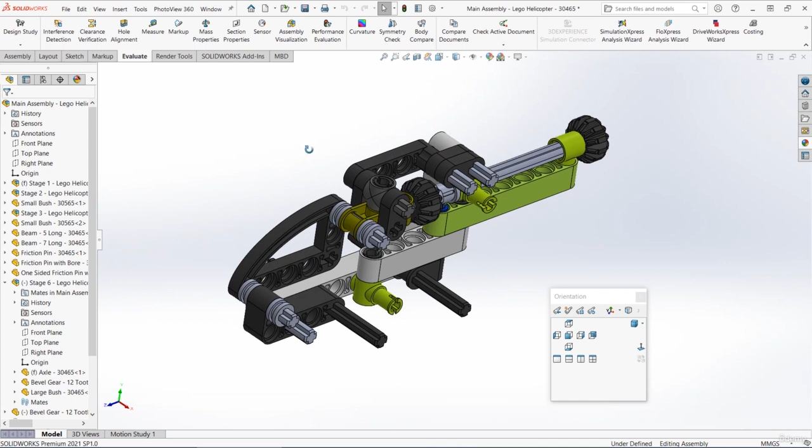We're now carrying on with stage 6, and for this one we're making the axle joint part. This is a little bit harder than the axle we just made, but luckily we've got a part that's halfway there. That's the large bush part. Let's open that from within the assembly somewhere, and then we'll save that and make some changes.

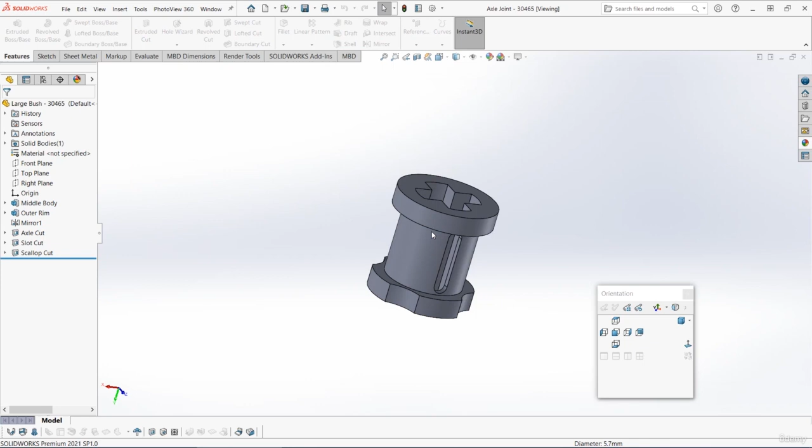Go to File, Save As, and choose Save As Copy and Open. And I'm going to put the file name down as axle joint. We need to now add another section to this part that can hold an axle perpendicular to the first one. To start off, let's start a sketch on the front plane. Let's get the circle tool and draw a circle about here. That should be 5.7 millimeters diameter.

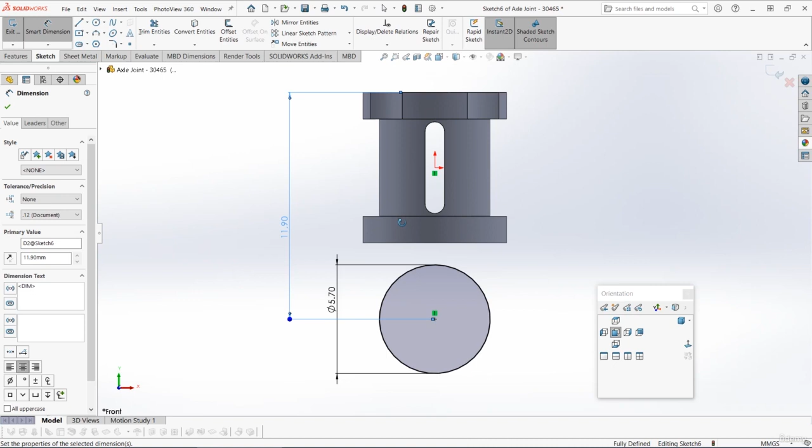It should be lined up vertically with the origin, and then the distance to the center of that circle from the bottom of the existing part is 11.9. We can then do a mid-plane extrude 7.8 millimeters. And I'm going to call that middle top. Next we're going to add the rims. So I'm going to start a sketch on either of these end faces.

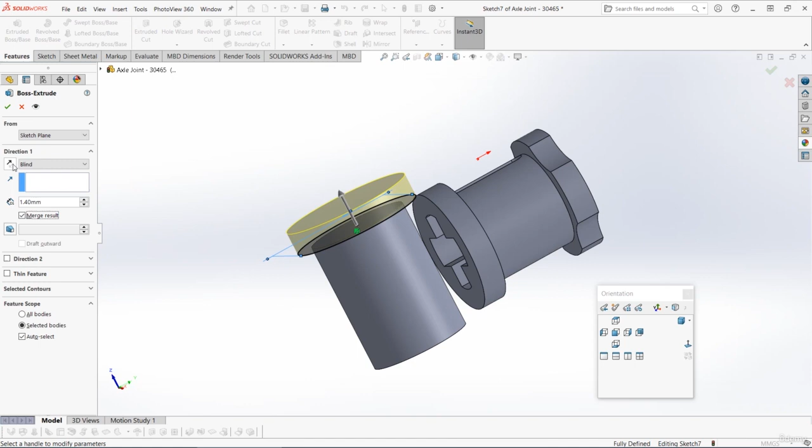I'm going to get the circle tool and I'm going to draw a circle that's a little bit bigger. This one should be 7.4. Then we can do a blind extrude 1.4 millimeters and make sure it's going inwards like this. This just adds that rim on the end. So I'm going to call this one top rim.

We can then mirror this over because there's one on each side. So let's select that top rim feature. Let's select the plane down the middle. So for me, this is the front plane. And with both those items selected, press mirror. Then press OK if the preview looks good.

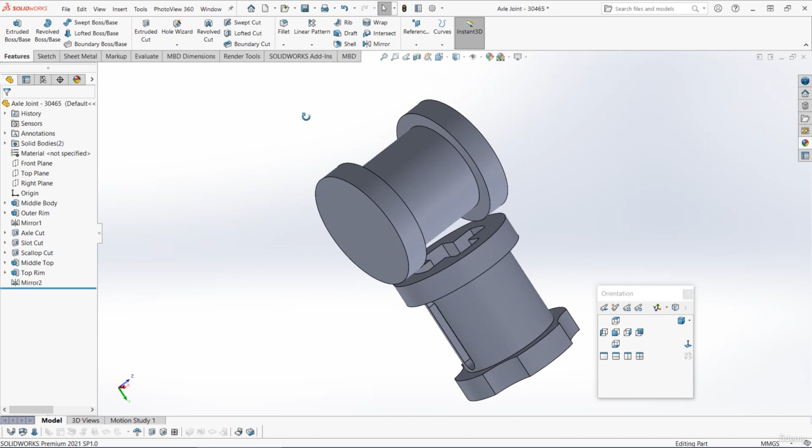Next up, we're going to add the section that joins these two bodies together. Start sketch on this plane, the right plane. Then go normal to and get the line tool and draw a sketch something like this. Start at the midpoint here. Go out to the left horizontally, a little bit beyond the end of that existing body. Then go downwards and pick up that outer line of the second body to about here.

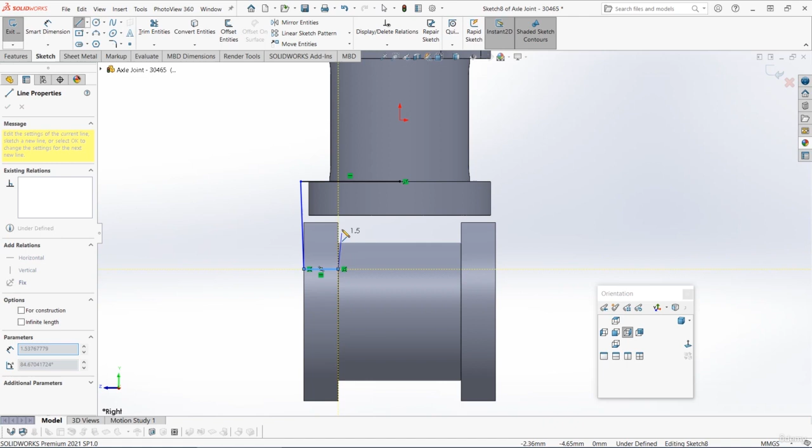Then go over to the right horizontally to pick up this edge. Then go vertically up to this end, then go back to the midpoint, and then go back up to the start point. And then this line on the left-hand side should be exactly vertical. So you can click on that and add a vertical relation. This should give you a sketch which is almost fully defined. We just need to add one dimension.

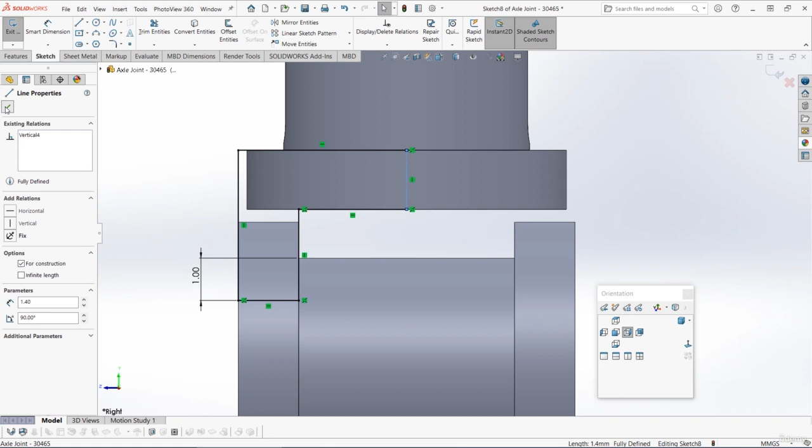Let's just get Smart Dimension and add in 1 millimeter here. So you should have a closed profile, something like this. We can then select this line in the middle, and then here on the left, choose For Construction. That turns this solid line into a construction line. We can then select everything in the sketch, and we can press Mirror Entities, and that will mirror everything we've selected about that center line. That should give you a solid profile that looks like this.

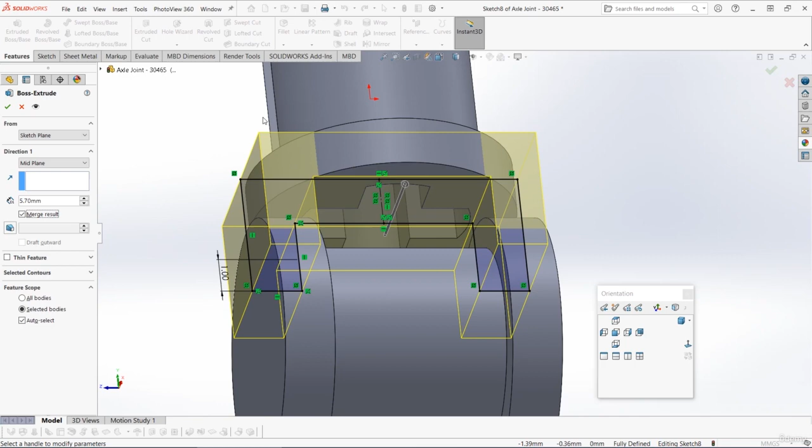We can then extrude this shape using a mid-plane extrude, so let's go to Features, Extruded Boss Base. Let's go mid-plane and 5.7 millimeters. It's the same as that inner diameter at the bottom. And I'm going to call that feature something like axle joint.

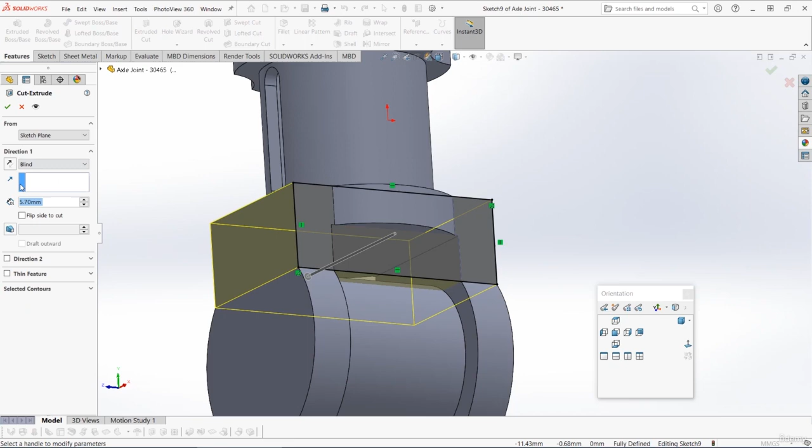Next up, we just need to cut away this curved section here. So I'm going to start a sketch on this flat face. I'm going to go normal to, and I'm just going to get a corner rectangle. I'm going to start from this corner and go down to this corner. And that should fully define your rectangle because the opposite corners are fixed. We can then just go to Features, Extruded Cut, and let's do a blind cut in this direction away from the main body.

It doesn't really matter what the distance is as long as it cuts through that curved section. So I'm just going to leave mine as about 5 there. We've now cut away that extra section and the joint is exactly the same size as that lower diameter.

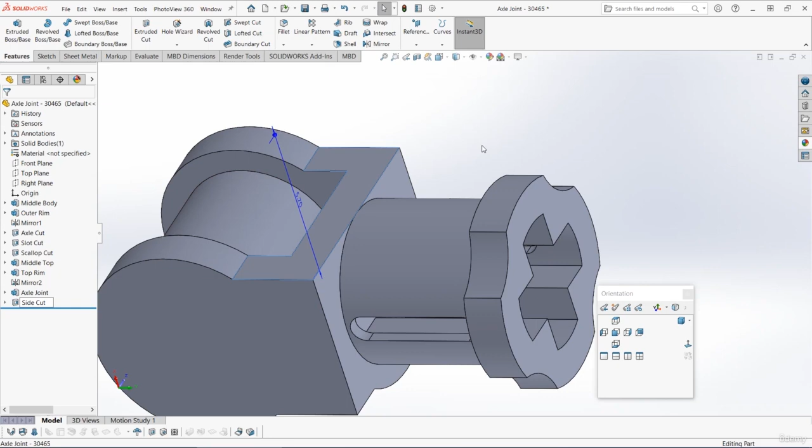I'm going to call that one side cut, and we then want to mirror this over to the other side. So select the side cut, select the plane that goes down the middle of the model. This should be the right plane, and then press mirror. And if the preview looks good, press OK. So we've now cut that curved section on both sides.

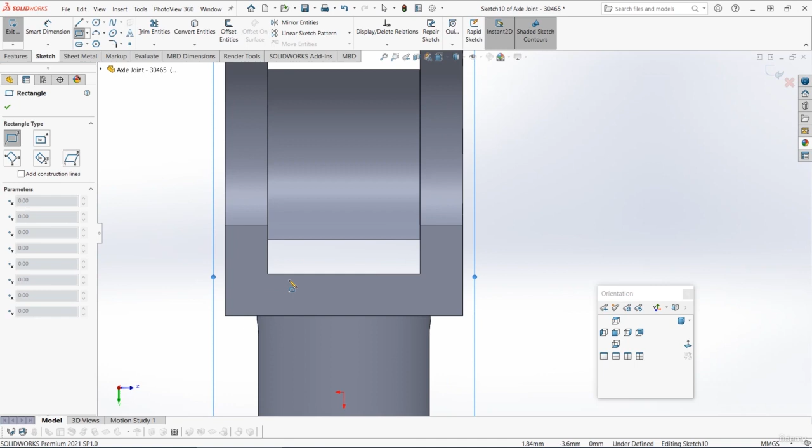Next up, there's a little wall inside this gap here. To draw this, start a sketch on the right plane, and then get a corner rectangle, and let's just draw from the bottom corner here up to this corner here. And again, that should fully define your rectangle because you've defined the two outer opposite corners. Then let's do a mid-plane extrude, 1.4 millimeters mid-plane, and press OK. And let's call that something like middle wall.

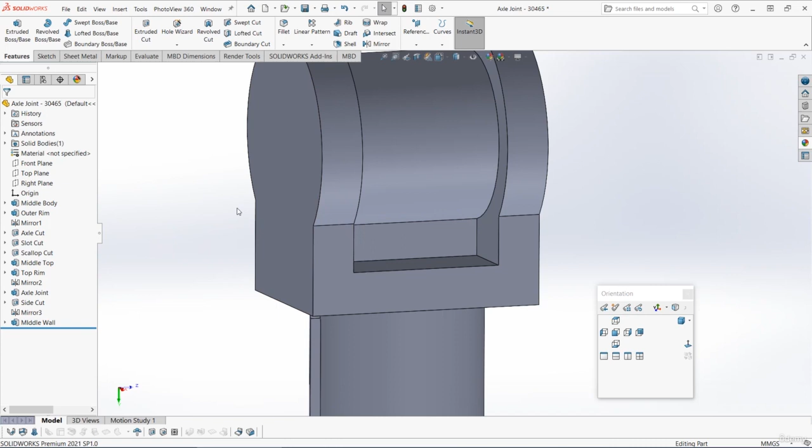Now the bottom of this overhanging face is actually angled. We probably don't really need that extra detail, but we're going to add it for completeness anyway. First, I'm going to select the plane that goes down the middle. So this should be the front plane. And with that selected, choose the draft feature from the Features tab. This feature lets us add a draft angle to a face.

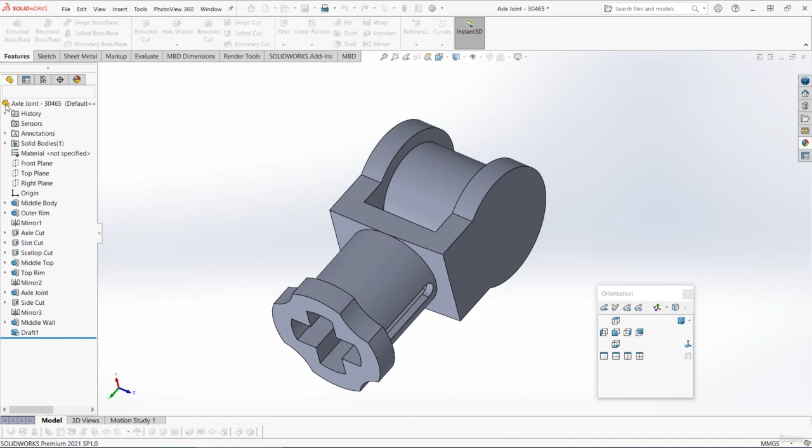We should have the front plane selected here. And then for the faces to draft, let's just choose this face here. And we'll set a draft angle of 3 degrees and press OK. And it should add, if we look from the side, a slight angle like this. If you find that your angle's in the opposite direction, what you can do is edit that draft feature and then just flip the direction. You can do that just by pressing this reverse direction box.

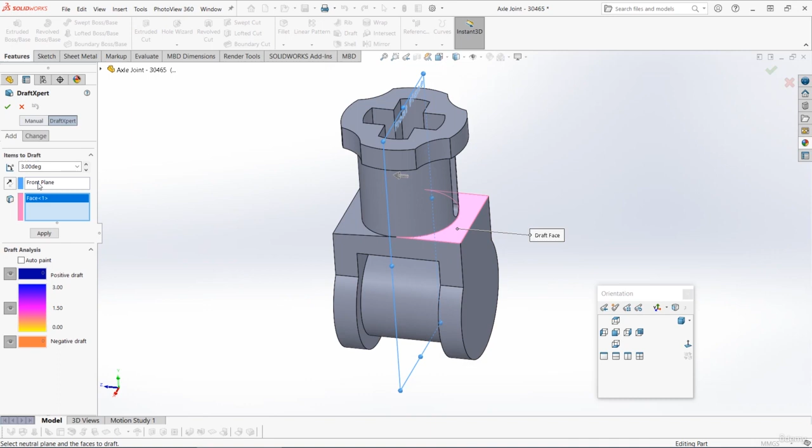Then let's just add the same on the other side. So let's select that plane again, the front plane. Also select the draft feature and then choose the face you want to draft and set 3 degrees. And you'll have to reverse the direction on this side compared to the other side because we're drafting in the opposite direction. And if we look from the side, it should look something like this with those 2 angled edges.

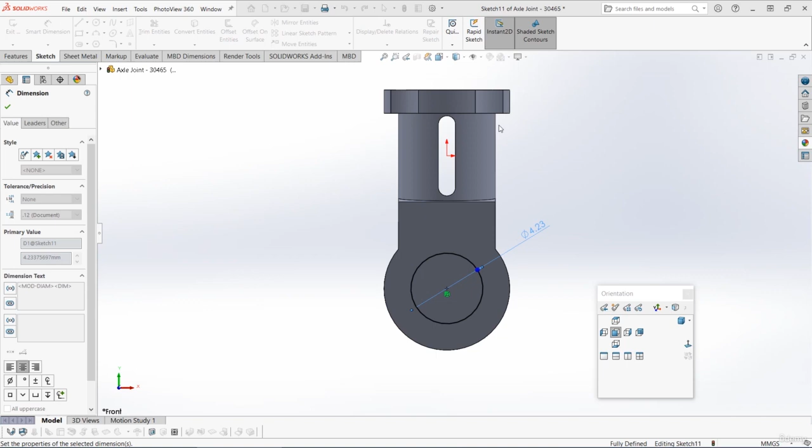Next up, we can actually cut the axle hole. Let's start a sketch on the front plane. Let's go normal to and draw the axle cut that we've drawn loads of times now. It starts with a circle that's 4.8 diameter. And then there's 2 center rectangles. They're the same width. That's 1.8. And then the length of them is set by making them tangent to that circle.

We can then do an extruded cut and we can go through all both. And we can select in the selected contours all 5 of those areas of the cross to cut out. And when you've made that, you can call it axle cut.

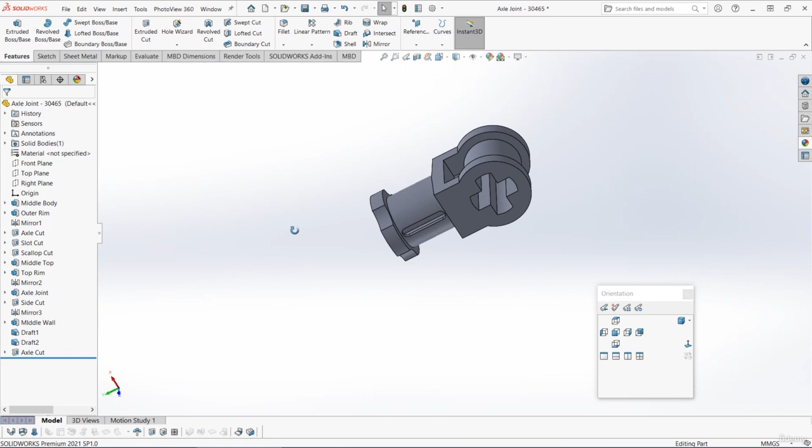We're now almost done. All that remains is to add the slot through the middle of the top. Start a sketch on the right plane and get the slot tool and get a center point straight slot and draw it roughly in this position. For the size, it should be 1 millimeter high. It should be 3.8 long along the middle of the slot.

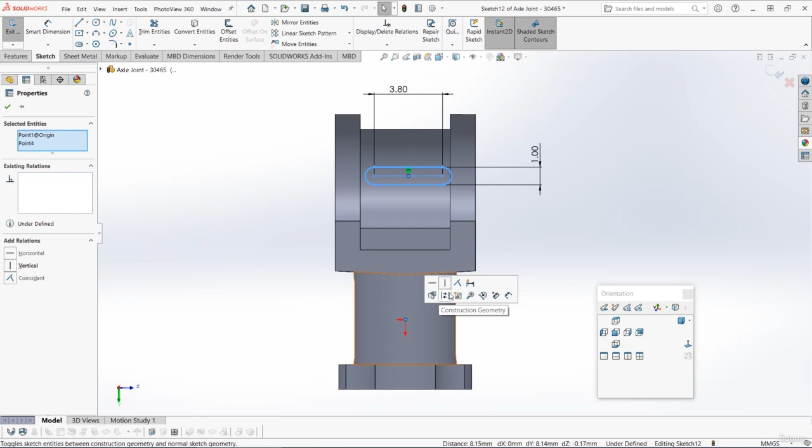The middle of the slot, so the center point, is lined up vertically with the origin. And then the position to the middle of the slot is 11.9 from the very bottom of the part. Then to finish off, we can just do an extruded cut through all both. And let's call that one top slot. This part is now complete, so you can save your part. And in the next video, we'll use these parts to complete stage 12.